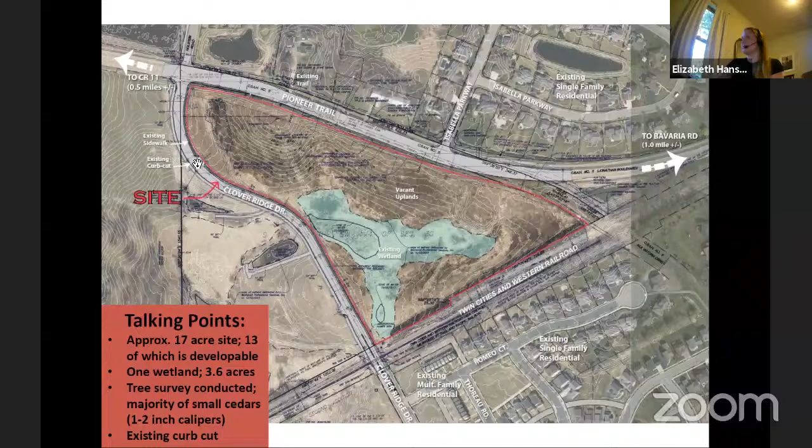The other piece to note is there is an existing curb cut on the east side of Clover Ridge Drive, which was in anticipation of this property developing. It's located about 400 feet south of the Pioneer Trail intersection. They will be utilizing this existing curb cut as the entrance into their development.

And then we've got the site plan for the overall development here. Again, they're proposing 54 units total, made up of 11 buildings on the site. 3 of them will be on the north side of this proposed road, and 8 on the south side. Each building will be either 4 or 6 units, for a total of 54 units. They are planning these to be owner occupied, so as you'll see on the preliminary plat, these are all separate lots to be privately owned by each homeowner.

One big change from the concept plan: in the concept plan, they proposed a private street, mainly due to the constraints of the site. With a private street, you can go lower in width, so that's what they explored initially. But they couldn't afford the option to do private utilities under the private road. So in this preliminary submittal, they have switched to a public street with public utilities, so the city would be the prime owner of both the road and the utilities underneath it.

This public street ends in a cul-de-sac at the southeasterly portion of the site. They are proposing ponding on the south side, gaining maintenance access from the end of this cul-de-sac. There will also be an amenity area on the southeasterly portion, with an area for grilling, some benches and picnic tables, a fire pit with seating around it, some open play field area, and a trail which would ultimately connect into a passive trail around the pond.

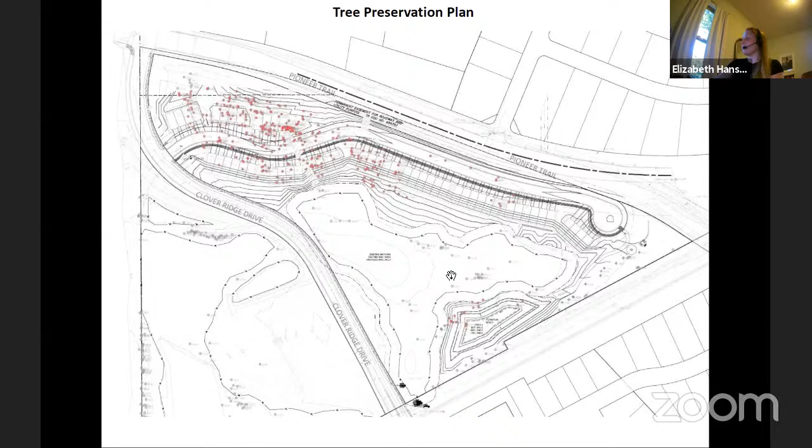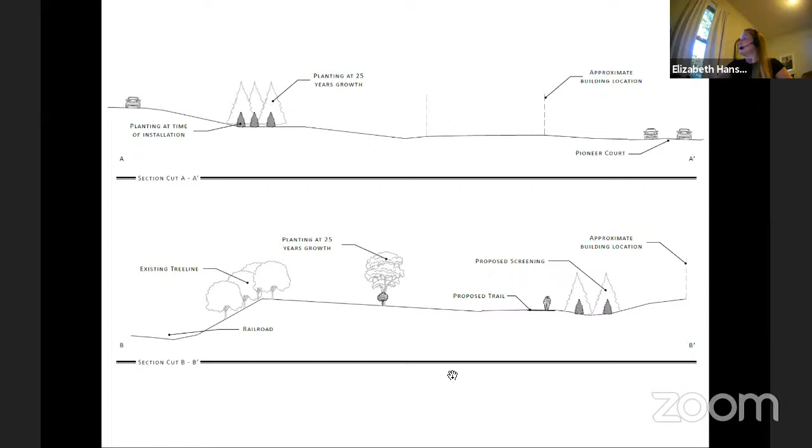I'm happy to answer any questions. Otherwise, the applicant is also in attendance tonight to help answer questions. Questions? I just had one. Liz, can you back up to where you're talking about the cars and trees in relation to sight lines? I noticed that Pioneer Trail's elevation is higher, obviously, than the houses.

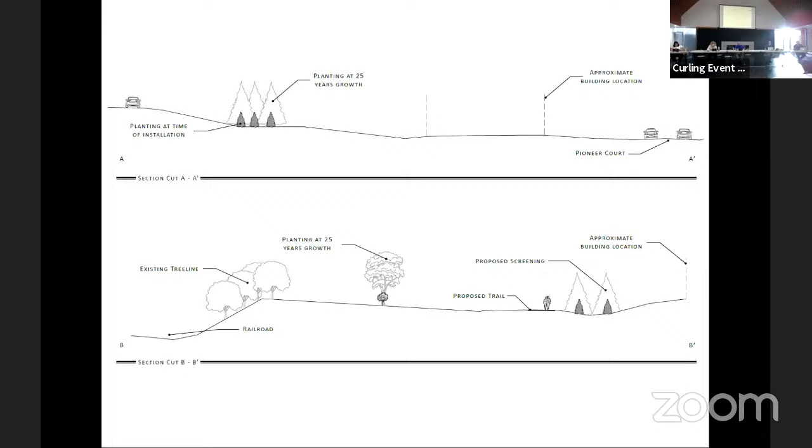My question really relates to Isabella Parkway and some of the units. If you forward to the neighborhood plan, where Isabella Parkway comes out, would the car headlights shine on the second floor of those units that are going to be directly across, or is that far enough away? I know in 25 years it probably won't matter when the trees fill in, but in the immediate future, is that going to be a problem?

That's a good question. And I think it might be better answered by Josh Metzer with Lennar, if that's something that they've looked at and have confirmed whether it's going to be an issue or not. All right, any other questions for Liz before we bring Josh up? I think this probably falls under Liz.

So now that it's going to be a city street, I assume that means city plows are plowing that snow. Is the thought that the end of the cul-de-sac and that green space would be where you'd pile the snow, or you haul the snow out of there? Any thought? I think what has been highlighted so far is that the end of the cul-de-sac is going to be where a majority of the snow is going to go. Plus they have open areas on this side as well to get more snow storage.

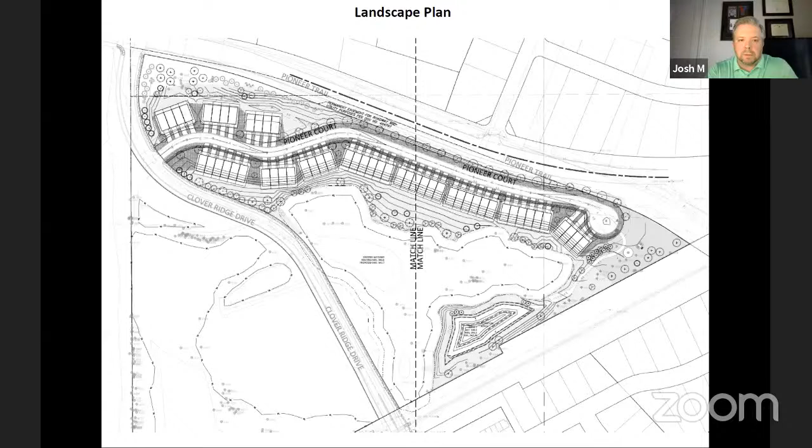I personally really liked seeing the open field. I liked the concept there at the end. I don't have kids, so I think that's really versatile for anybody that would want to use it, whether it's teenagers that wanted to put up a volleyball thing and have a day, or adults or kids. So I personally really liked the idea of an open area there at the end. It's more versatile. Sorry, go ahead.

No, you're fine. Well, I'm not opposed to the waiting portion. I live in a townhome with a 5-year-old, and I know that with the lack of yard, that's a very desired amenity as an owner of a townhome, that you don't have the space to put a playground in your backyard. You don't own it. So to have something there accessible when you have small children is really desired. But at the same time, I can understand if your homeowners aren't people with small children, then I get the space part of it. So I'm not opposed to waiting, but I think you do have to consider that these people most likely aren't going to have large yards, so that would be a very desired amenity.

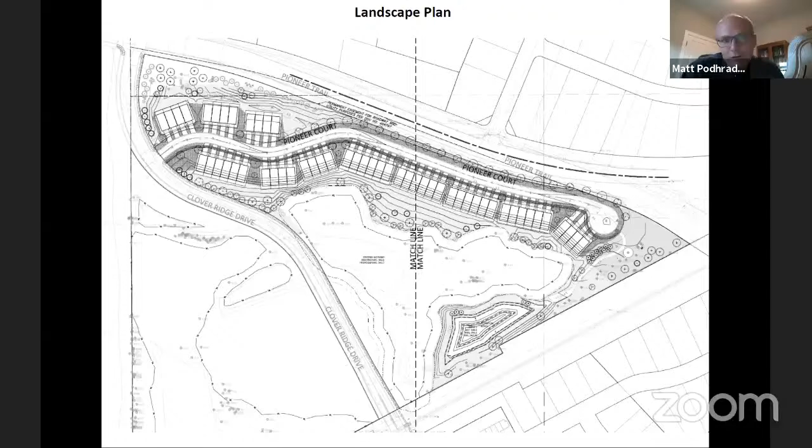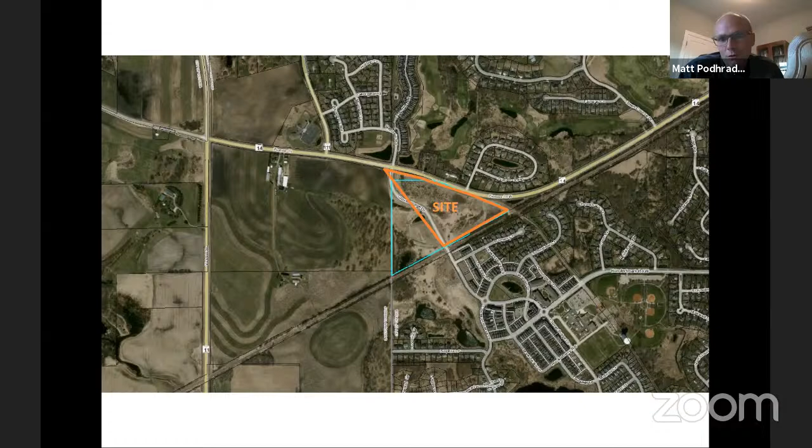There's a Jonathan tot lot, probably about 5 blocks to the south of here, and about 6 blocks to the south is the Clover, or the community park playgrounds. So this, to me, if you're going to make the decision, should be based more on the site and maybe some of the limitations of the site, because to make it based on what their sales are at 50%, it's pretty cumbersome. And I'm not sure it means much, because that's going to change over time. To me, it's what decision is being made for the long-term interest of this site.

So were the 2 nearest playgrounds then, which ones again? Okay, so that one over there, and they like the community park. And then down at Mark Twain and Hunter Mark. Okay, right there. No, down farther, even farther. Right there. Okay, right there, and then over at the school.

So basically the one to the south is closer, but it's not something you'd like, it seems like it's a little further than you'd walk a toddler or a tyke to. And the one to the north, you'd have to walk across Pioneer Trail, right? Yes.

Kelzer Park is to the north, and Pioneer Trail is kind of difficult because of the high-speed nature of that roadway. So it seems like, logically speaking, you probably wouldn't want to walk your kids across, so it basically becomes driving your kids to some sort of playground. That would be a natural boundary if we were looking at this from a city park development perspective. Pioneer Trail is a boundary that we wouldn't cross. So in that case, it seems like it would make sense to have something there, some sort of a playground.

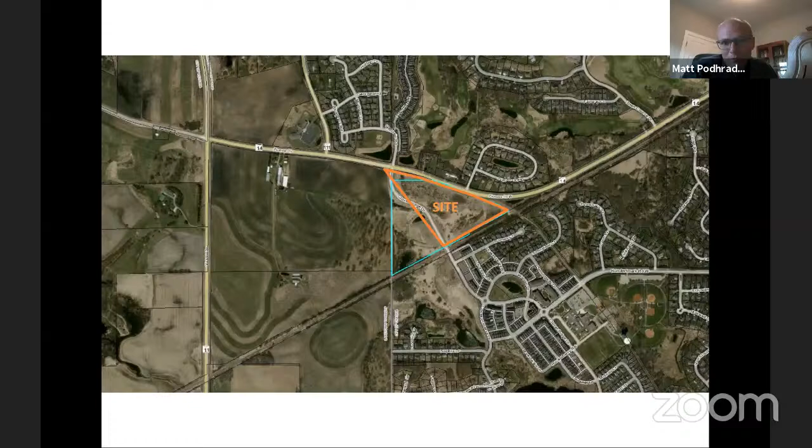Yeah, I mean, certainly it meets our definition of being within a quarter mile of a neighborhood park. But the neighborhood parks tend to be for that age range of kids that are just a little older. Walking a toddler to a park 6 blocks away, they're going to be tired before they even get there. We can, also, later on, it's probably easier to add the fire ring and stuff than it is to add a tot lot from an association perspective.

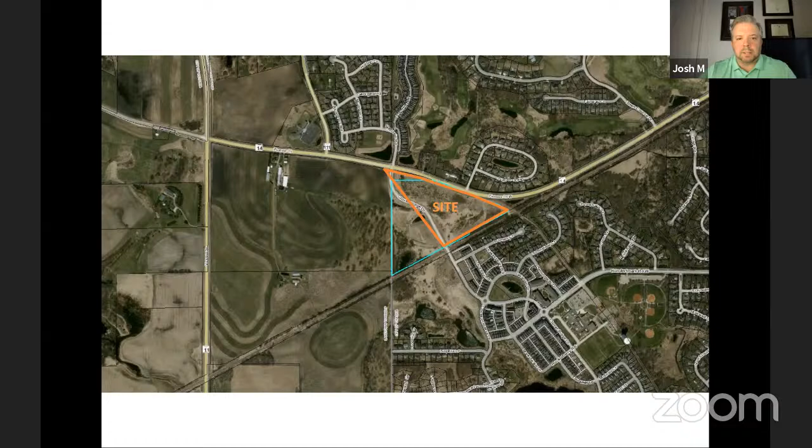I was just going to say, this is Josh with Lennar. After hearing the discussion, we can go ahead and include a form of tot lot. I know previously Liz had pointed out there's a space on the north side next to the 3 buildings on the north side. We would actually probably prefer it be located off the end of the cul-de-sac by the other amenities, just because that's the area of activity. That's where you're going to have the most adult supervision and the most traffic.

So yeah, we can include a tot lot, but we would prefer it be located there somewhere in the playfield area, probably. Well, I'm glad you did. I wasn't seeing the council remove that condition anyway, so thank you for keeping that in as a condition.

So, all right, any other questions for Josh, Liz, anybody? If not, I'd entertain a motion. Let's start with, do we have to do the variance or the rezoning first, or doesn't it really matter?

Actually, I had one quick question, Mr. Mayor. Liz, do we need to make a point to change the language about the trail material? Yeah, we should probably put it on record. There's a condition to add a mulch trail around the stormwater pond, but the preference would be, and this is coming from our Public Works Department, that it be a mowed trail as opposed to a mulch trail. So still providing access for people around this stormwater pond, but having it only be mowed.

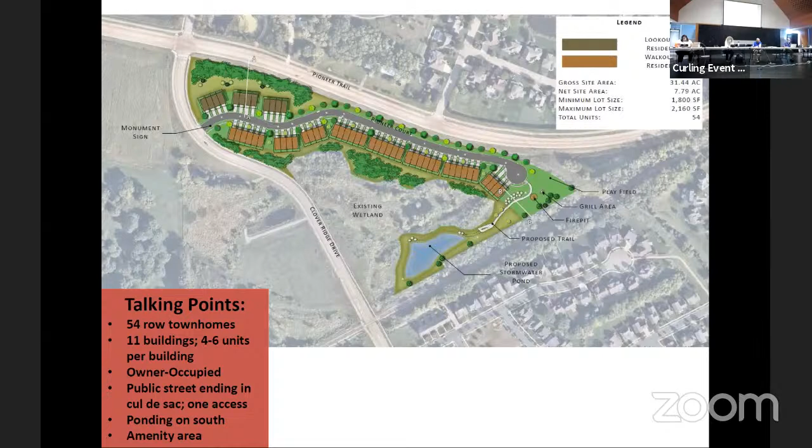Hearing none. Councilmember Hatfield, yes. Councilmember Grah, yes. Councilmember Hubbard, yes. Councilmember Wong, aye. Mayor Winchell, yes. Passes 5-0. With that, then I'd be looking at a motion and a second for ordinance 979.

Which is the rezoning from, I believe, R to PRD, forgot the number. 76. Oh, PRD 76. So moved. Motion by Councilmember Wong, second by Councilmember Grah, to adopt ordinance 979, which is rezoning from rural to PRD 76.

Discussion. Hearing none. Councilmember Grah, yes. Councilmember Hubbard, yes. Councilmember Wong, aye. Councilmember Hatfield, yes. Mayor Winchell, yes. Passes 5-0.

Okay, thanks, Josh. Thank you very much.

All right, moves us on to 8B, adopt resolution 2020-68, approving a variance to encroach into the wooded steep slope and setbacks for Tract B of RLS Number 117.

Mayor and Councilmember, this is another item coming from the Planning Commission. This is the applicant—I may say their name wrong—the Acevedo residence. They are looking for a variance to be able to build a living unit. They have some pretty significant restrictions on their lot that are difficult to work with. Staff has done an analysis on hardship, which there's a pretty defined process through state statute for us to look at and come to recommendations. This is coming out of the Planning Commission with a recommendation that the variance be granted. Liz is here to present the findings of that variance study.

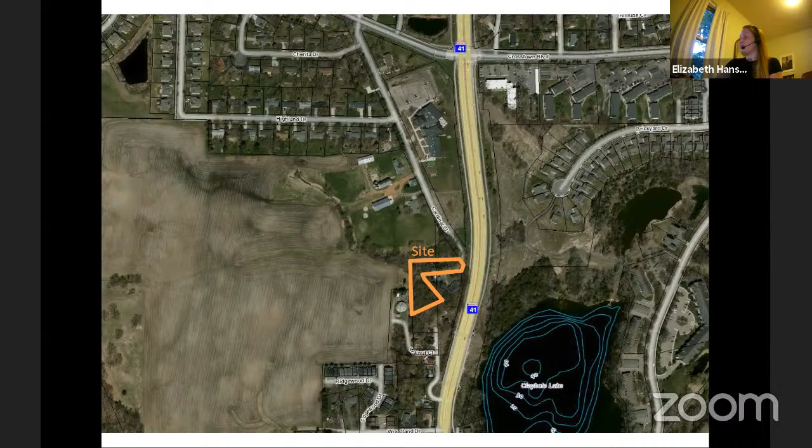This is a more zoomed-in perspective of the lot that we're looking at. It's composed of two separate parcel ID numbers, but it is one contiguous parcel as we look at it. The topography contours are also overlaid onto this aerial exhibit just to give you an understanding of some of the steepness occurring in and around the overall area.

So a bit of background on this property in particular: the Registered Land Survey Number 117 was approved back in May of 1998, so at that time it was platted. Tract A, just to the east of Tract B, consisted of the existing home at the time of the person proposing this plat. Tract B was basically platted for the anticipation of a future residence, so it was set up to be able to have an additional residence on it.

At the time of those approvals, there were a couple of easements also put in place over this property, over both Tract A and B. One is a scenic easement on the north side of this tract, encompassing the ravine and steep wooded area around it, basically a preserved area to be maintained in perpetuity. Then there's the cross-access easement, which allows both Tract A and B to gain access off of the shared driveway off of Cardinal Street.

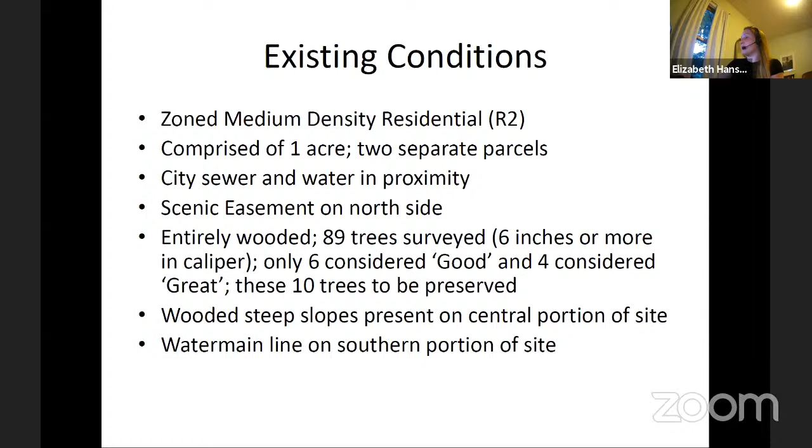Wooded steep slopes are present on the central portion of the site. When we say wooded steep slopes, it's basically any area that's 18% in slope or greater and has woods on it. That dissects the middle of this property, and I'll show where that is in the next slide. Lastly, there's a water main line that dissects the property on the southern portion of the site too. So that's just another added challenge to the site itself.

So what they're asking for tonight is a variance from section 9.9.3 of the zoning ordinance, titled setback from steep slopes. It's basically an ordinance that protects wooded steep slopes of 18% or more, and establishes setbacks on top of that to further preserve these areas. The reason they're requesting this variance is to be able to build a residence on the property. From a high level, the hardship they're facing is the presence of wooded steep slopes, the setbacks applied to those, and also the water main line that exists on the south side.

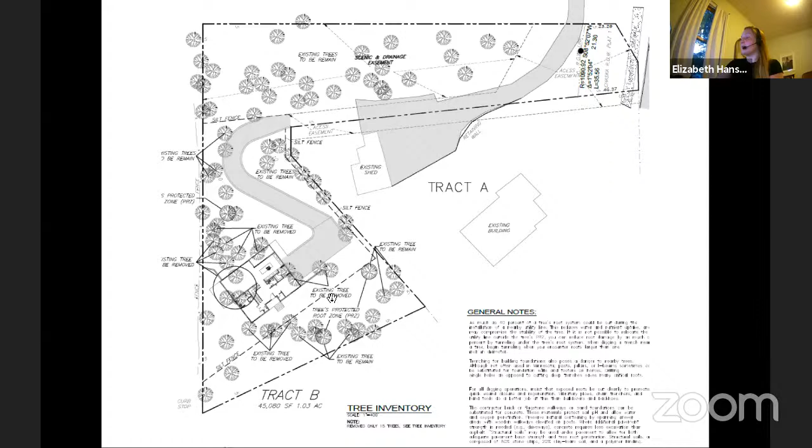They've also included a drawing of the proposed home. Their intention was to build up versus out, so they avoided a Rambler style home so it wouldn't have more of an expanse in terms of its building footprint. They're essentially proposing a 2-level above grade type home with a tuck-under garage for the basement area. The design was intentional to provide the least invasive building footprint to the property itself.

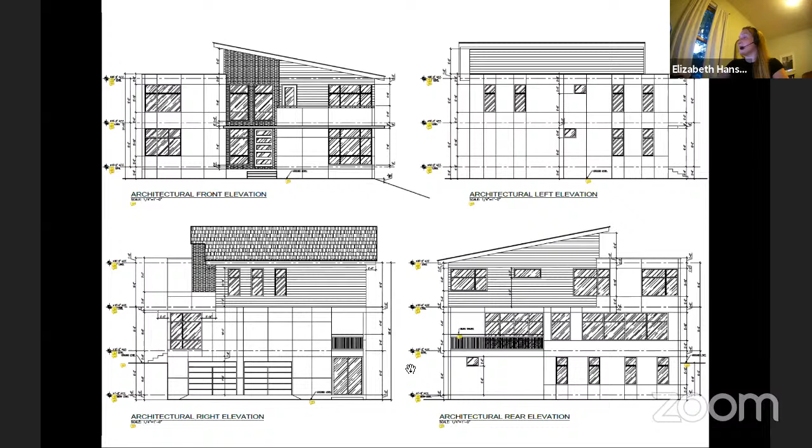There's usually one thing that has to be apparent for a variance application or request to come in, and that is the undue hardship on the property. When we say undue hardship, I'll read this definition: it means the property in question cannot be put to a reasonable use if used under conditions allowed by the official controls. The plight of the landowner is due to circumstances unique to the property, not created by the landowner, and the variance, if granted, will not alter the essential character of the locality. So the property has to have unique physical characteristics that would prohibit it from meeting all of the ordinances or regulations that would apply to that lot.

So just one thing to keep in mind as we go through this evaluation. When we review a variance request, there are specific questions we ask to evaluate it. A couple pertain to whether the variance will impair the health, safety, comfort, and general welfare of the public. Is it contrary to our comprehensive plan or any other ordinances? Is it proposing a use not otherwise allowed? Is it greater than necessary to accomplish the landowner's objective? Did they explore alternatives before reaching this conclusion, which could reduce or eliminate the request, and so forth. So the findings we've put together look at these questions and see how the proposal tonight fits into or answers them in order to grant a variance.

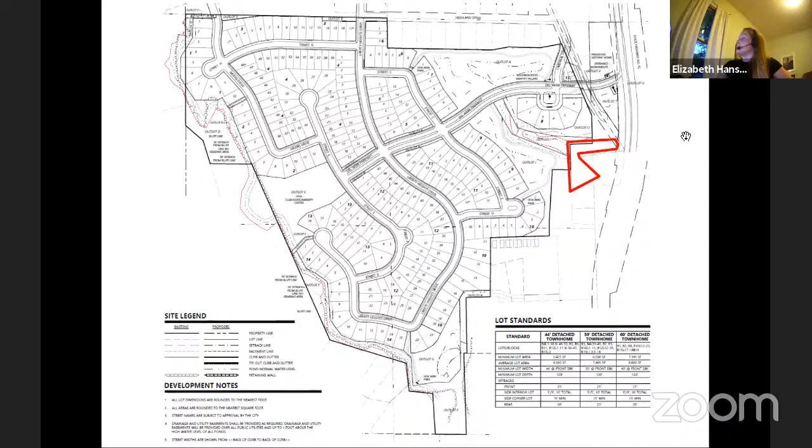I'm happy to answer any questions. I do believe the property owner is also in attendance tonight. Councilmember Wong, I do have a couple exhibits that you requested at the end of this PowerPoint as well, if we need to refer to those. Questions? Just two questions. One is, what's to the west of the property? I know what's to the west, but if one of you could pull up the exhibit, just so we get a little context. Yeah, maybe I'll use that one. How close the other neighbors will be.

Yep. So here's the preliminary site layout for the Hammers property. The property in question tonight is highlighted in red here. So they are basically abutting common open area and additional wooded steep slope area. Okay, so that water reservoir that's there, I believe the plan was that's eventually going away, right? Correct, yes. Okay, so then there's really not a lot, just the pond and some space before there's some homes to the other side.

Okay. Right. The other question is, how difficult would it be to get fire access up to that if there was some emergency there? They'll still be able to get access up there, but if they're so far away from the public street, then they are required to put in a fire hydrant. What did you say they were putting in, Liz? A fire hydrant. Weren't they talking about this being sprinkled? Right now, the house is not planning to be sprinkled. So because of that, they would be required to put a fire hydrant in if they're so far away from a public street.

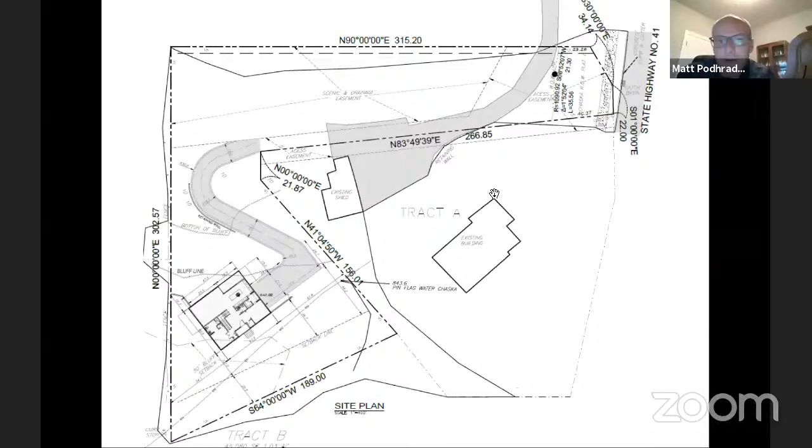Well, okay, so then why can't they do a smaller footprint of a house? Then it wouldn't encroach on those slopes. Well, Liz, correct me if I'm wrong, the amount of size that they would get without encroaching on that slope would be 500 square foot. Right. So I think the argument would be, is that reasonable? Right.

So if we got challenged in court on this, the argument would be, city, why did you make this a lot? Somebody then bought the lot with the assumption that because it's a lot, it has certain rights. And now you're only allowing 500 square foot. That's not a reasonable solution. So it's definitely interpretation, no doubt. But if we were to get challenged on this, we have to look at what would be reasonable. And I'm pretty certain a court would say a 500 square foot home is not reasonable in size.

And also just a clarification that legally, without a variance, they wouldn't be able to build a driveway either, correct? Right, correct. So basically it would be a dirt road with a 500 square foot residence. Right. Legally. Well, you can't even grade into the setback area, so.

You'd have to come in by helicopter. You'd park and walk. That'd be tough with trees.

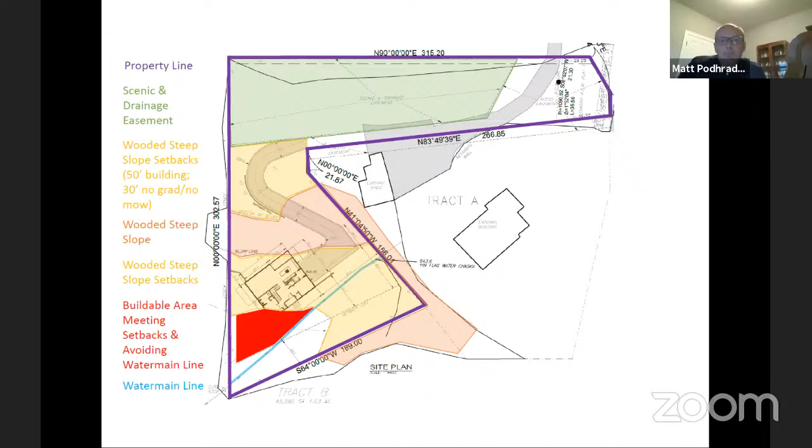Has it been looked at as a different access into the property? There's pretty much only one access into the property, and that was, again, set up through that access easement approved back in 1998. And they're trying to take the best approach up that steep slope as best as they can. So Liz, that might be more apparent if you put up the context map that you had at the very end.

Yeah, because why couldn't they come in where the old water tower is? It's just too short, too steep. That's a very, very steep incline there. Yeah, I know how steep the incline is there. I used to go up there. But it just seems like we're really getting hamstrung here on how this is a lot.

How long has this been owned, or has this been recently sold? They may know. I think they've owned it for at least over a year, maybe 2 years. I would make the argument that we hamstrung ourselves. The property owner has the right as a lot. Once the city approves that as a lot, which happened back in 1998, really who's being hamstrung at that point is us.

I think Kevin's exactly right. If nothing had happened in 1998 and this entire parcel, including the one with a house on it in the front, came to you and said, we're putting a house in the front and we want to split off this lot in the back so that we can put another house. Based on the discussion I'm hearing now, you'd probably say, no way. You guys can have the house up in the front, because that meets our steep slope, but we're not going to divide off a portion of property that's unbuildable. Because if we do, then you have a right to build on it. And so just the fact that decision was made back in 1998, it doesn't give us a lot of choice.

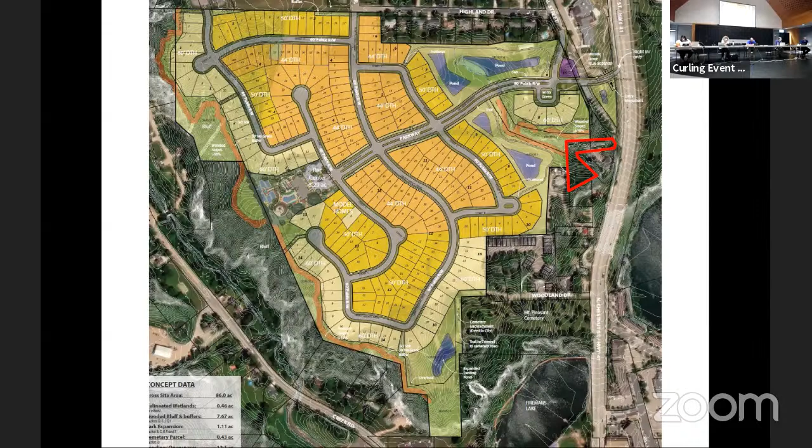Kevin, is there anyone on Zoom that has any interest or has any comments, any neighbors? There's nobody in the chat. Okay. All right, folks, what's your pleasure? Unless you have any more questions.

I move to adopt resolution 2020-68 approving the variance to encroach into wooded steep slope setbacks of Tract B of RLS 117. Motion by Councilmember Wong. Second. Second by Councilmember Hubbard. Discussion.

I still just, in my mind, I can't see this. It's just with the rains that we currently get now and all this, and why they're building, and how good are they going to be about protecting that during the build and then after. All right.

Councilmember Hubbard, yes. Councilmember Wong, aye. Councilmember Hatfield, yes. Councilmember Grau, yes. I can't vote for it. I'm going to vote nay. Can't do it. All right, passes 4-1.

4-1, so, all right. We move on to 8C, adopt resolution 2020-65, a resolution of support for Carver County's federal funding application for Highway 41 and County Road 10 mobility and access improvement. Mayor and council members, you're aware Carver County, in partnership with the city of Chaska, has been working over the past several months on a study of County Road 10. They've been looking at the whole section from County Road 11 all the way down to County Road 61.

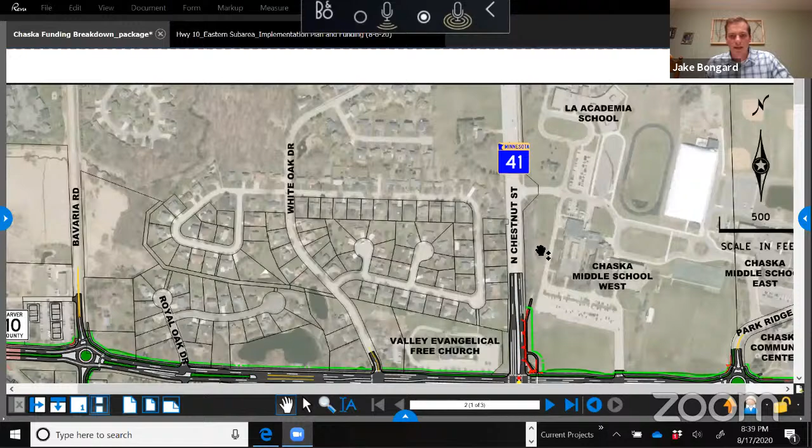We're also looking at some improvements to pedestrian facilities along the route, including a grade-separated underpass of the north leg of the intersection at Highway 10, to provide a nice connection across Highway 41 on the north side of the road up to Chaska Middle School. Let me see if I can zoom in here.

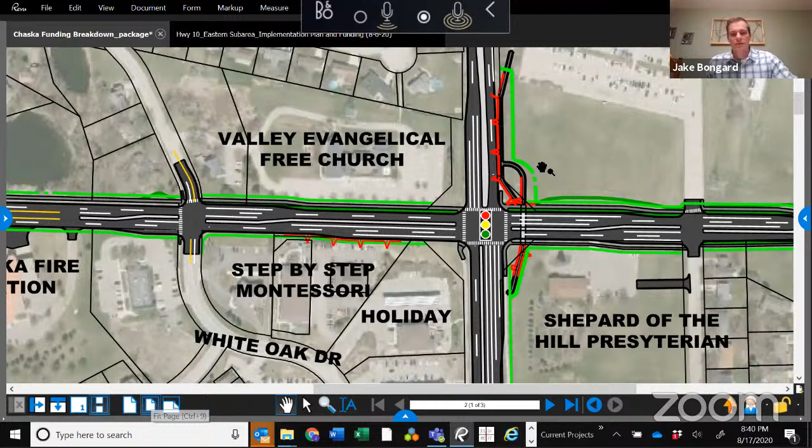Beyond that, little has changed since we last discussed this. What has happened is we've put a little more time into the cost estimates we've prepared, for both this application as well as the other application submitted as part of the regional solicitation program.

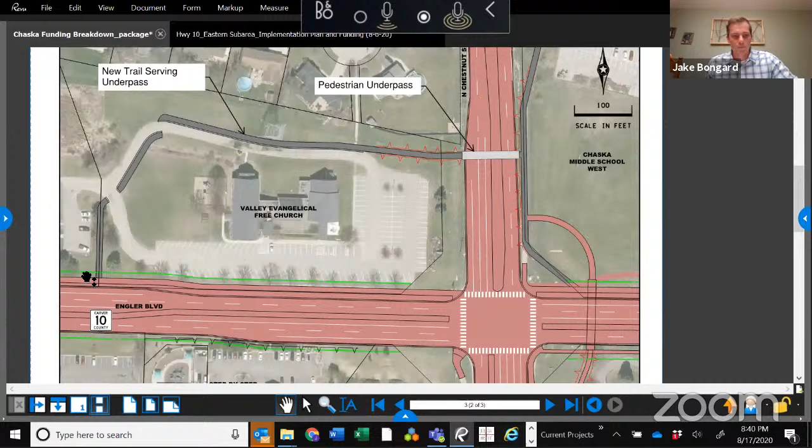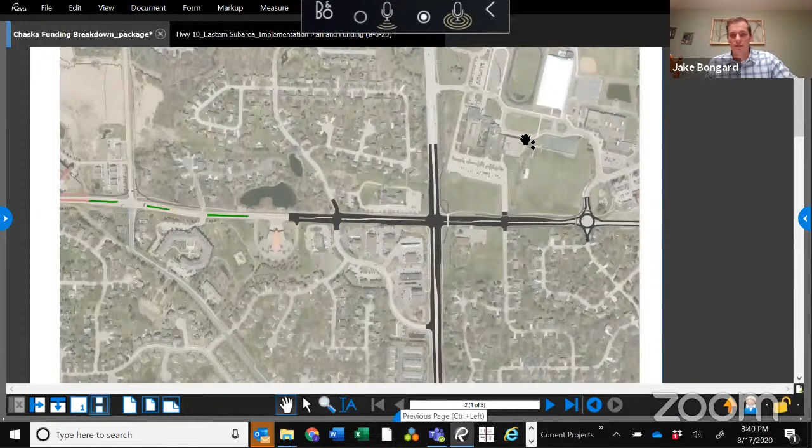This was a city-backed project also submitted, being that north underpass of Highway 41 along with the intersection. Some background as to why that underpass isn't currently included within this 10 and 41 expansion project: it was submitted as a separate project, and the intent is if both projects receive funding, they could be built collaboratively to achieve that full vision and get as much funding as we possibly could.

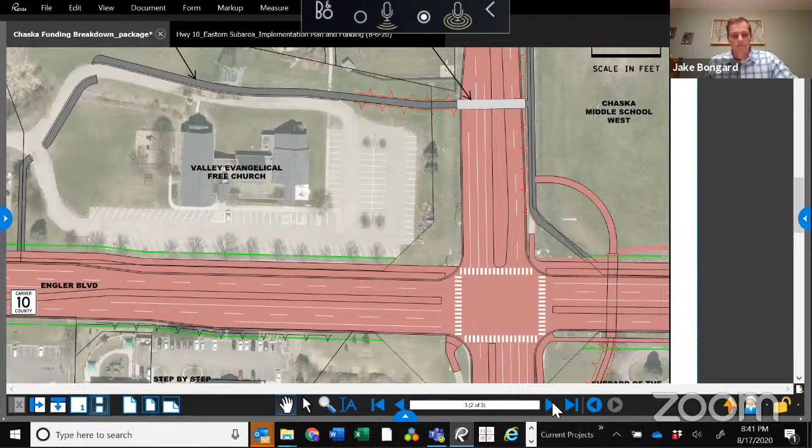So with the two projects, outlining the costs of each: the 10 and 41 roadway expansion, that's the full project. We ran cost estimates on that, incorporating the county's cost participation policy. We also had good conversations with the city of Chaska and Matt Clark, pulling together city utility costs that would be improved along with this project, since the road is being ripped up anyway, to go in there and improve the water main. So really trying to get a good all-encompassing cost of what we'd expect to see with the project.

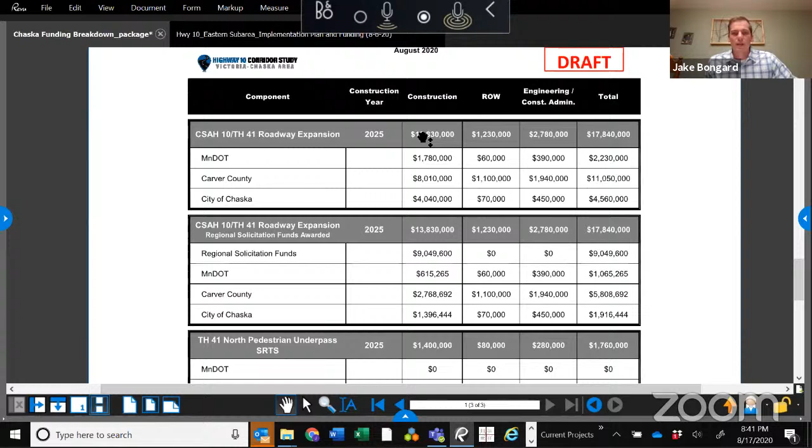What we're coming out at right now is about $13.8 million in construction costs for that 10 and 41 expansion project, with the split being about $1.8 million to MnDOT, $8 million to Carver County, and about $4 million to the city of Chaska.

The MnDOT allocated funds—we don't know exactly who's going to take care of those yet, but from a roadway perspective, we just wanted to split it out to understand where things would fall. So for context, we're looking at about a $13.8 million project, all inclusive for construction from Bavaria over to Park Ridge Drive, as well as those improvements on Highway 41.

With the addition of regional solicitation funds, if we were successful in our application, the requested amount was a little over $9 million. That $9 million would get pushed straight into that $13.8 million and essentially knock down the costs of each of the participating agencies. MnDOT's cost would go from about $1.8 million to $600,000, Carver County's from $8 million to about $2.8 million, and the city of Chaska's from about $4 million to $1.4 million. So the benefits of that regional solicitation would be spread throughout the different agencies participating in the costs on this project.

So Jake—yep. Is it the end number in all of that, or is it the front column? Because now you're tacking on, at the end, another 400.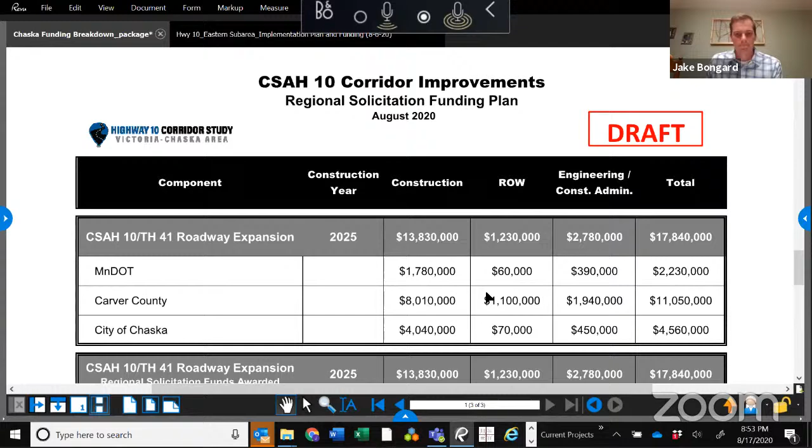Okay, thanks. Jake, can you go to the overall map, please? Yeah, happy to. I got a call from a resident who said they didn't believe they were getting the notices. They would be on the southeast corner.

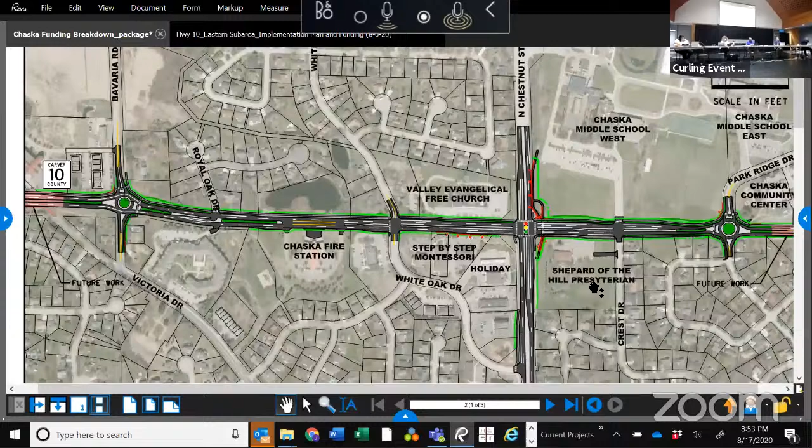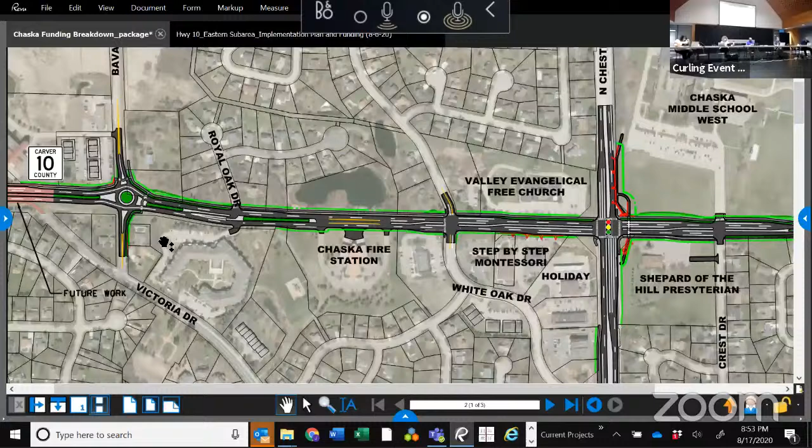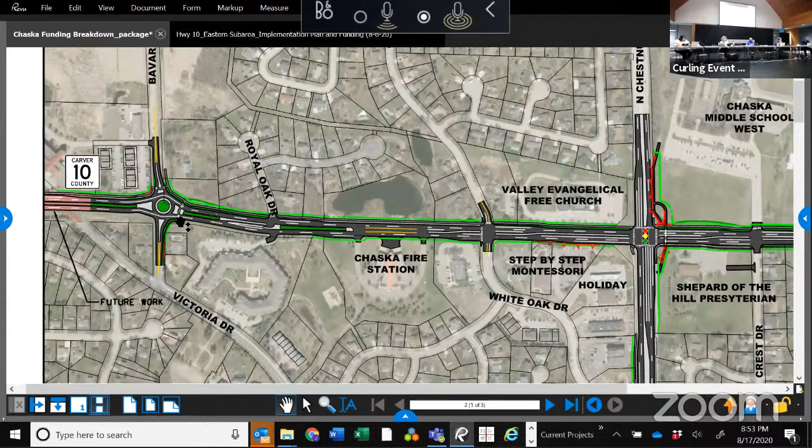The Bavaria roundabout, right there, that property. Oh, back up — nope, the other way. Right there. No, the one with the pool. Wouldn't it be one up, right there? No, up one. It's one up, right there. Oh, down, right there. All right, it must just be looking a little different. I think it's this one. Yeah. Okay, yeah.

She was really upset about it, and I said, well, there's been 3 or 4 meetings, and she said she wasn't aware of it, didn't know if she saw it, but we've got to make sure she gets involved in this next phase if we can. Their last name is Heights — I missed her first name when she called. But I just want to make sure that property gets included.

Oh yeah, thank you, Mr. Mayor. We'll make a note of that. We go through our standard process of finding addresses and sending out notices, and sometimes they just slip through the cracks. So we'll be sure she's connected going forward.

Good, thank you. All right, so we just need a motion. I mean, we're all done, right, Jake? Yep. So we just need a motion again that basically we're just writing a letter of support, correct? Correct, correct. Okay, all right. This is, to me, a no-brainer. So if anyone's willing to make that, or if there's any other questions — Kevin, anybody on Zoom?

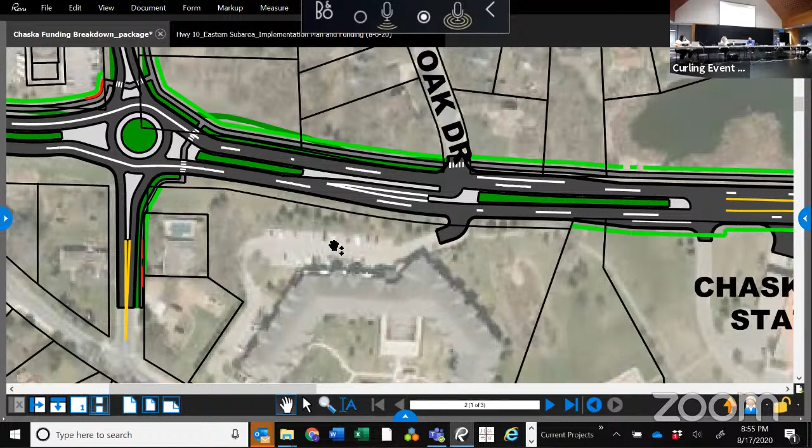All right, just real quick, my brain is still on 8B. I just want to mention something here to the council so it doesn't get lost. One of the things we as a council do is make sure we look at things that won't tie councils down in the future. Whether or not this lot was split for political reasons or friends or whatever, I can't answer any of that. But we always got to make sure we make the right decision for the greater good of the city of Chaska, so a council sitting here in the future doesn't have to look back and say, that council in 2020, I can't believe they made that decision.

I know most of you are fairly new, and I think that's an important thing we need to do: our goal is looking out to the future. What are we doing, and making sure we're doing it right, and not doing it politically. We're doing it for the right reason for the city of Chaska. So I just needed to make that comment. I should have done it during that motion, but I just wanted to get that out there to everyone.

Okay, all right, now let's get back on track. Sorry about that. 8D is adopting resolution 2020-72, and that's to deploy funding provided by the CARES Act.

Mayor and Councilmembers, I'm going to turn this one over to Nate. Council members, this is a pretty lengthy staff report that I presented to you in the council packet, outlining the city's, or the staff's, recommendations for how we use the CARES Act dollars that were allocated to the city back in June of this year. The city of Chaska received just over $2 million, $2,081,049 to be exact, and there are some general guidelines around how those dollars get used.

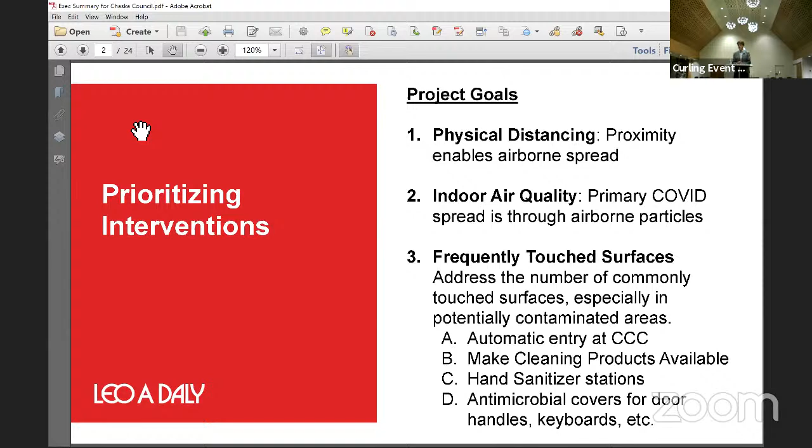Project goals: physical distancing, indoor air quality, and dealing with frequently touched surfaces, primarily entries, such as at the CCC.

We reduced our overall action items list to 6 scope items: the library vestibule renovation, the city hall main level lobby renovation, the city hall level 2 renovation in two different areas, the two locations at the police department, two primary entries at the CCC, and the HVAC ionization upgrades. I can explain that briefly, but I'm not sure we want to dive into too much technical detail at this time of night. We're more than happy to pull Kalen up here if we need to.

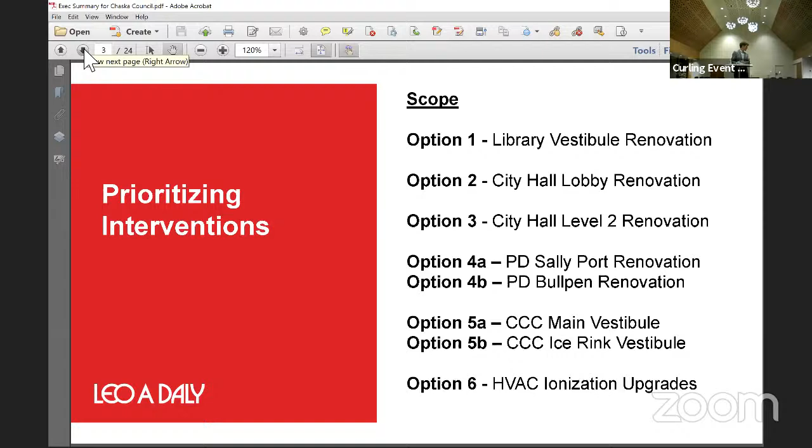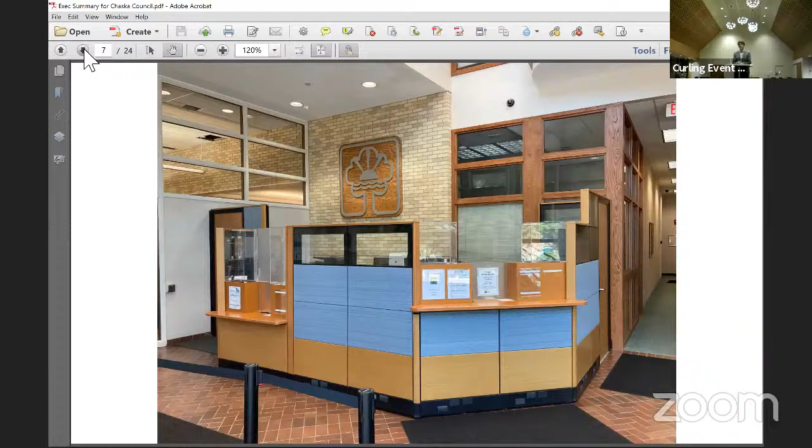I'm going to click through the next 6 slides every couple seconds here. We're looking at the areas affected by this project as they currently are. So you've got the main entry, the library main entry, which is going to receive a vestibule right there. This is again the main entry looking down the corridor at the conference room, which will also be affected. This is upstairs looking toward the city council chambers and the clerk's desk.

We're in PD looking at the bullpen, which will be demolished. And then we're looking at a Sally port, which is more or less defunct now and can be repurposed for those additional officer desking.

Almost all of these serve those 3 goals: reducing touch points, allowing for some level of strong social distancing for employees to come back to the office. And what we're not showing here is anything HVAC, but really one of the things we're doing across the entire city is these HVAC improvements, which, once you've dealt with the air and the actual airflow and quality of air, affect the primary way that the COVID virus can spread in offices.

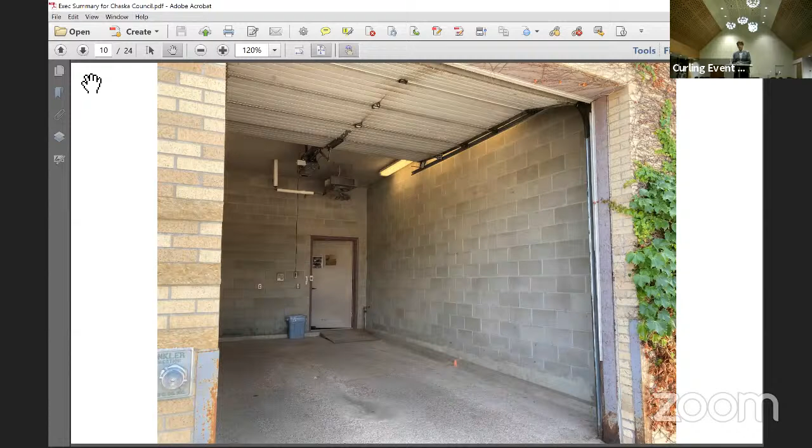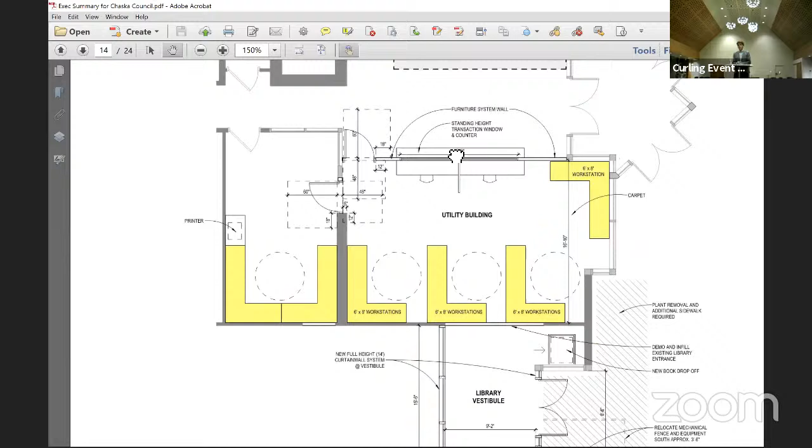Leo A. Daly is a full-service engineering and architecture firm. I manage the team of those engineers and architects, and we bring our full-service project experience because this will affect most of those disciplines - a little bit of structural, mechanical and electrical. There will be a little bit of civil in this project, and then there will be heavy interiors work, too, which will work very closely with Chaska's interior vendor, who has already worked on past projects with Chaska.

Looking at this here, you've got the main entry into city hall. I won't go too long on any of these, but we've effectively taken that L-shaped workspace and sent it across the entire wall as you walk in on your left side. This becomes the new transaction interface. There's a door to the left that billing and utilities staff can pass through, and this entire area with the yellow desks becomes the billing and utilities office. It consolidates all of them but also allows enough social distancing for them to work safely all day long. You have those 2 transaction windows, which allow easy passage back and forth to serve clients as needed.

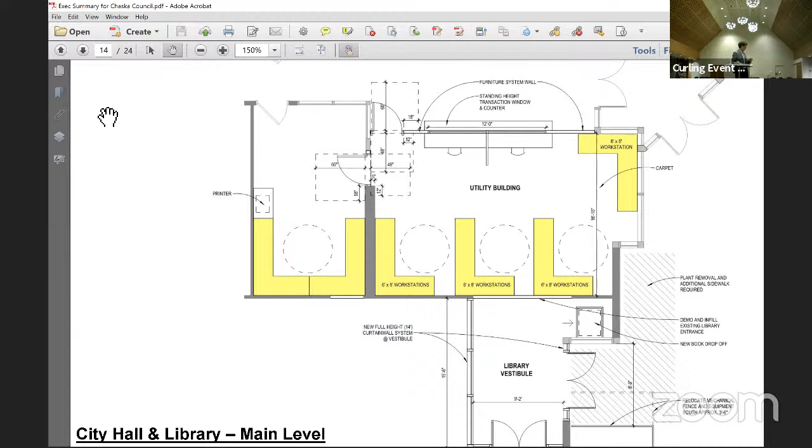And then down below, the library vestibule. The primary thing happening here is on the north side of the library vestibule, you're seeing that white wall - that used to be the door. That's going to be demoed and filled back in. We're actually taking a part of the exterior metal panel wall, and that will be the new entrance into the library vestibule.

There will be a little bit of site work - we'll re-landscape a little to make that more of a primary entry. This will be a glass vestibule with full visibility in and out, and that will send you south towards the current desk of the library. You can go to the next one, Alex.

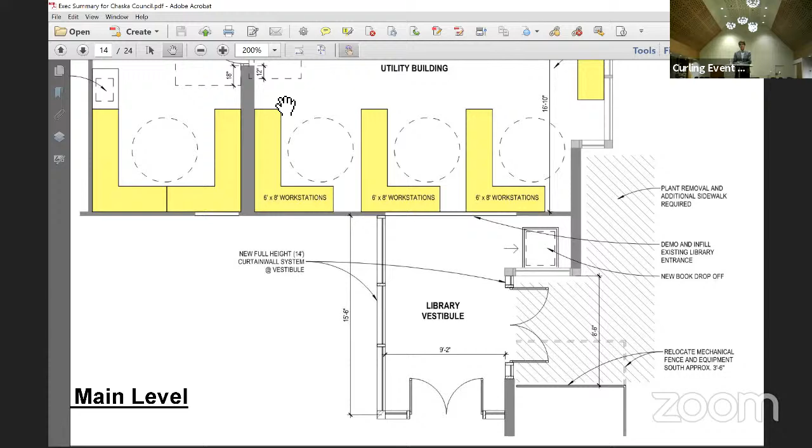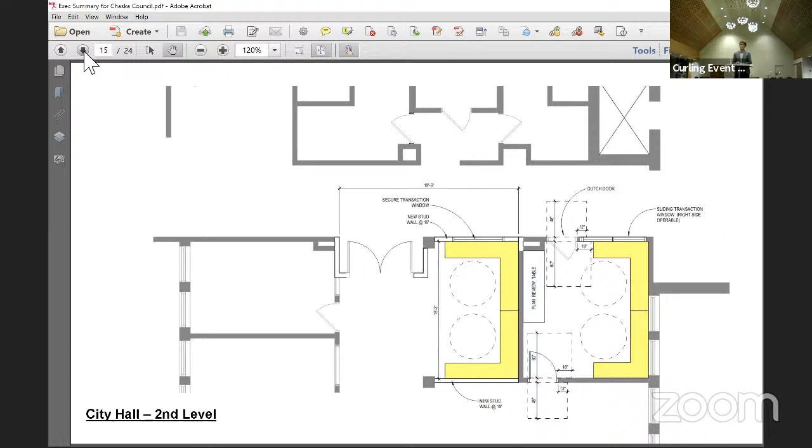One of the things I'll point out real quick is, to me, what this did is really 2 things. It spread people out more so that you're able to accomplish social distancing. But the other thing it did is we, in essence, had 3 conference rooms that were unusable. So we had the Valley conference room on the 1st floor, sort of behind the utility billing desk now.

We had the Bluff conference room, which is that small one right when you come up the stairs to the 2nd floor. And then we had the community development conference room, which is actually where I'll be moving my office into. All 3 of them were spaces that we couldn't accommodate, like Nate said, more than 2 to 3 people in them. They're impractical.

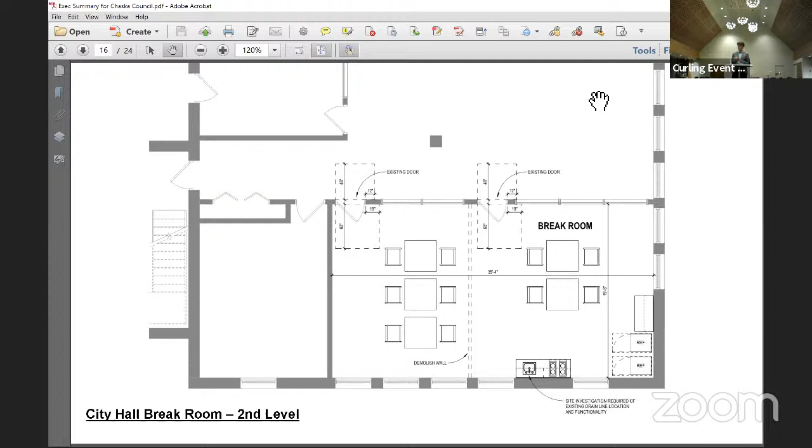Another item to note here is this room on the bottom right, when it was utility billing, we were told was quite loud, and there's conversation happening all the time. So by converting the main level conference room to utility billing, we allow kind of this open space and enclosed sort of phone call space. And there's potentially some flow through there depending on what people need to be doing. But you can go to the next one, Alex.

The other sort of interesting note is when City Hall was first built, this is where our break room was. So it's sort of come full circle that now the break room's coming back to right where it started.

And I think we're all at a point now, I mean, we design office spaces all over the country, and we're at a point where we cannot exactly tell you what a conference room should look like, because we don't know exactly what companies or cities are going to do for new offices. So right now we're having a hybrid city council meeting. I think the idea of a single hybrid break room, meeting room is pretty flexible now and is probably the best approach.

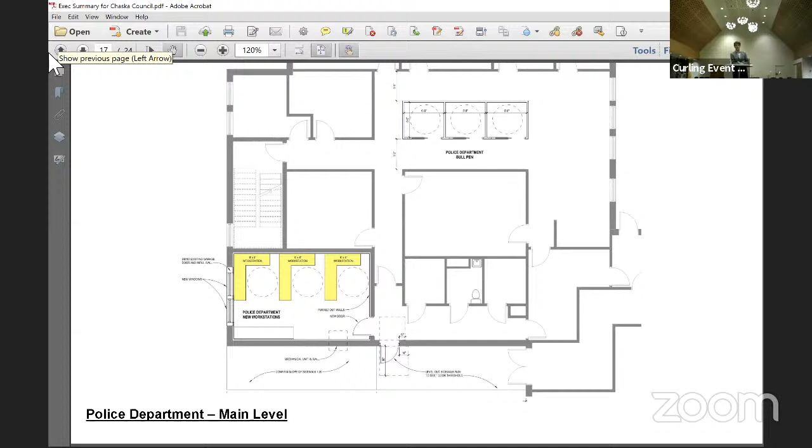Walking through the PD, there's 15 other things that probably should be done, but knowing that it's potentially a temporary home for the PD, we picked the 3 most important. So you can go to the next one. If there's no other additional questions on PD, I've only got 1 or 2 more slides, I believe. So this is pretty important.